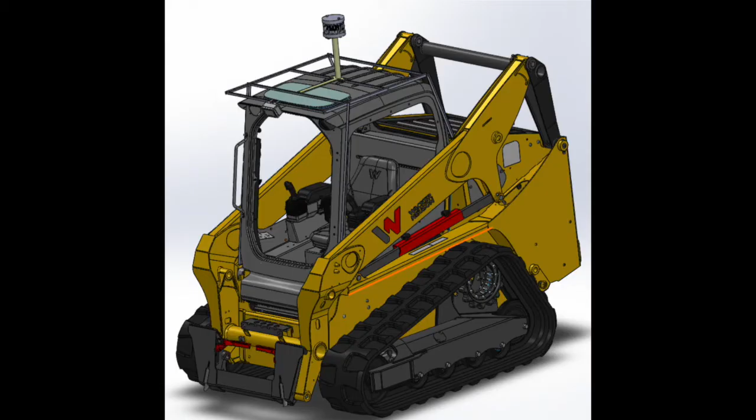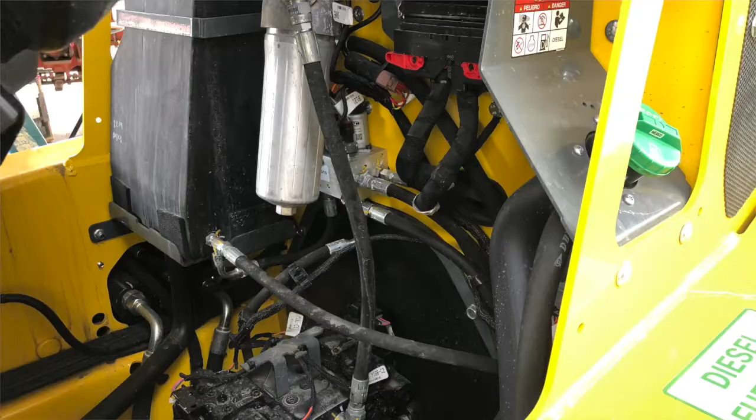EquipmentShare has tasked us with creating an autonomous-ready skid steer. By this, we mean making a skid steer that has all the systems in place to be ready for autonomy, minus the code to drive the vehicle. To do this, we planned on using a radar and two auxiliary cameras. But due to the radar being a prototype and not ready by January, we redesigned the system to use a LiDAR with two additional cameras. To interface between the vision subsystem and the vehicle, we used the NVIDIA Jetson TX2 to connect to the vehicle via the CAN bus, in addition to a computer simulation to mock the real-life design. This is what our project entailed. I'm Mark Carapino, and I'm a systems engineering major.

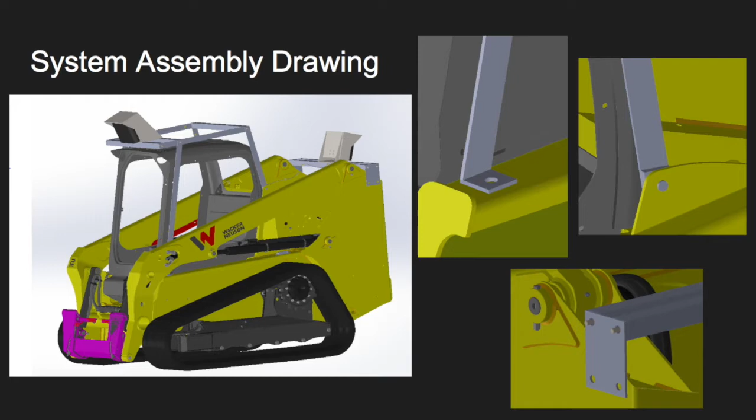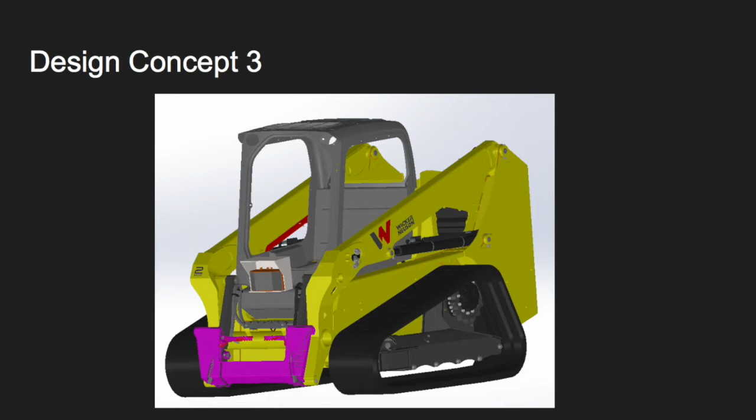Our approach to the problems of this project was to research materials to ensure they would meet the specs required, test those materials, and ensure the overall function of those materials in the system overall. On the screen, you can see some of our preliminary designs. Throughout the project, at the request of our sponsor, many changes were made to the overall system. We will show you how we responded to these changes with flexibility and ingenuity.

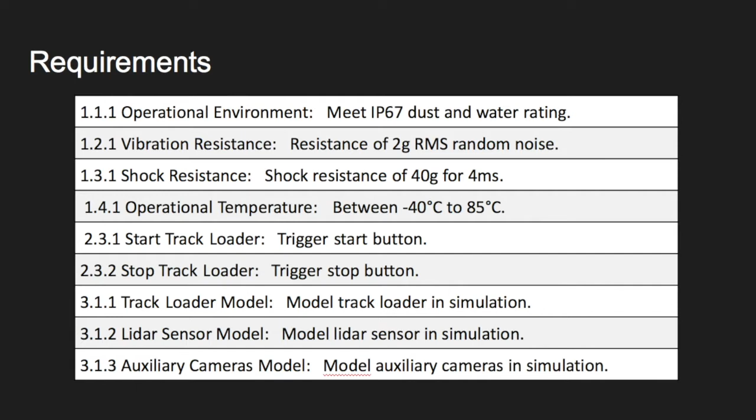Our major requirements state that our system must withstand shock, vibration, and varying temperatures. The performance requirements specify that the LiDAR is to be integrated onto the track loader and operate at its maximum potential. Additionally, we were required to operate the basic controls of the track loader. For this simulation, we are meant to demonstrate all components intended for the physical system of this project.

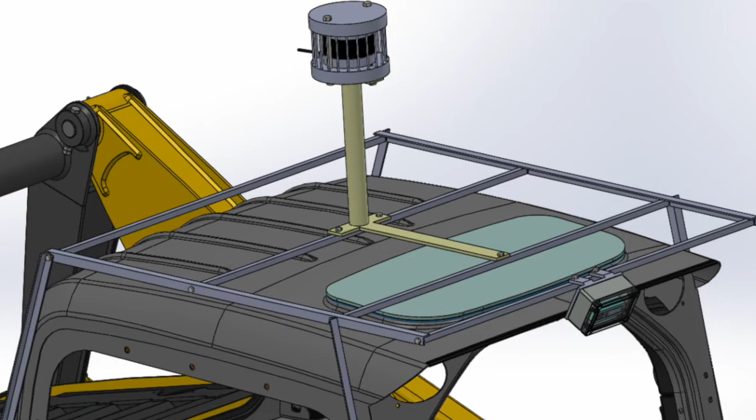In the first picture, you can see our Wacker Neuson skid loader with our final design integrated. The cage is made of 1/4-inch steel bars and secured to the loader using 5/8-inch thick grade 8 medium carbon alloy nuts and bolts. As you can see, there are several cross members running over the top of the cab to make sure the structure is rigid and also supports the heart of our project, our LiDAR.

The LiDAR and its enclosure are lifted nearly a foot above the top of the cage for maximum vision performance. The LiDAR is protected from rocks and other debris that may be found in the workplace by 1/4-inch steel bars welded to the bottom cap. The enclosure is capped on each end with a 1/4-inch thick steel measuring 6 inches in diameter.

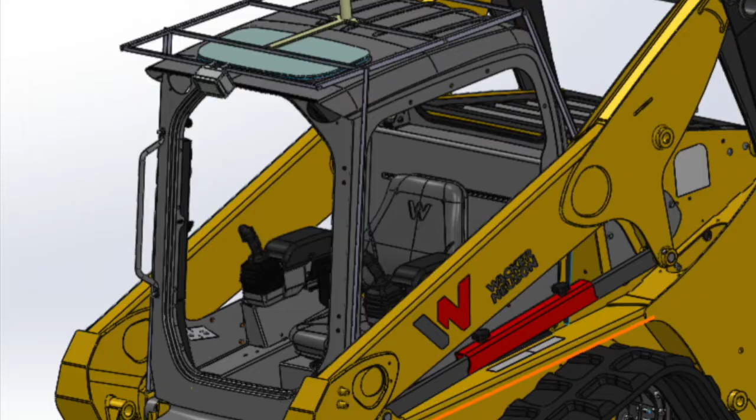Here you can see the pico flexx camera and the enclosure attached to the front of the cab and the rear hood. These are here to cover close quarter proximities that are not covered by the LiDAR. The enclosures are ordered straight from McMaster-Carr and modified with our 3D-printed holding tray that holds the camera right up against the plastic.

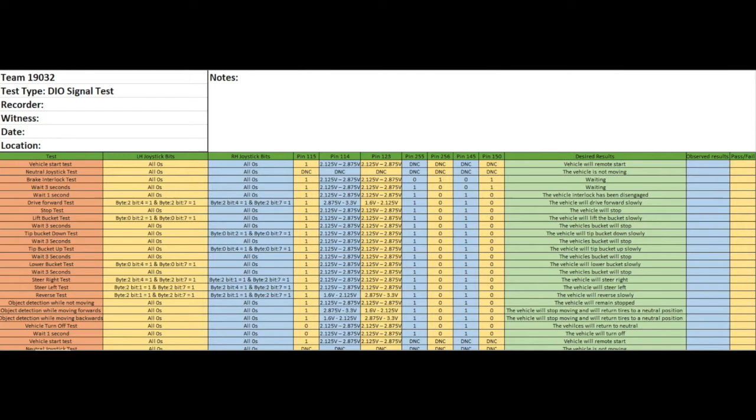A test plan to ensure that the digital I/O signals perform the correct functions to operate the vehicle was created. These signals, when sent to the machine control unit, would test all functions of the vehicle under the control of our system. A series of LiDAR tests were performed to ensure detection distances for humans and vehicles.

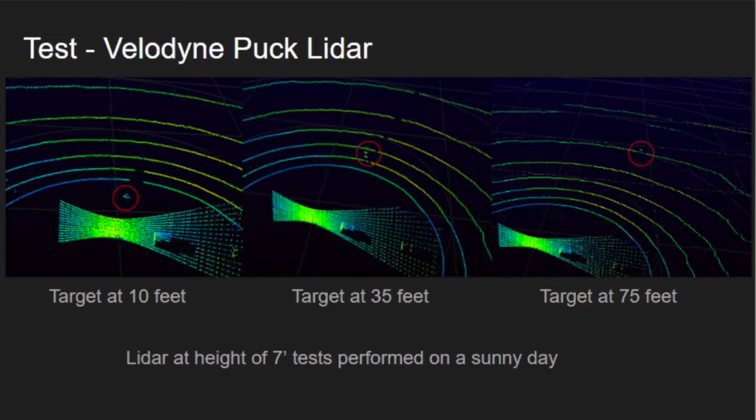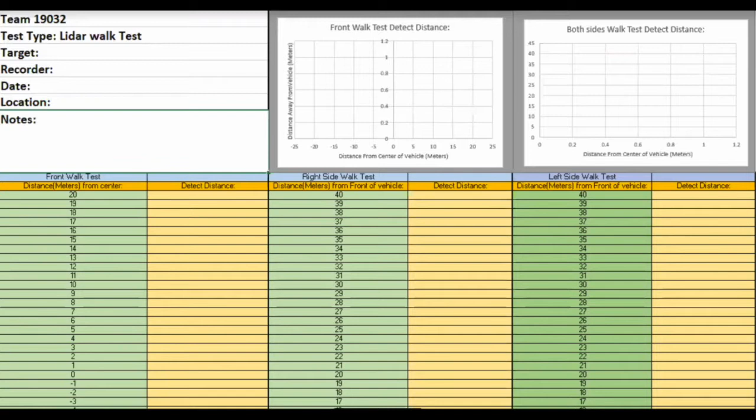These tests were performed with and without the acrylic protector. These tests confirmed that the LiDAR would not be able to see through the acrylic, contrary to what our research had predicted.

This discovery is what led us to change the acrylic shield to a wire shield, which performed as well as the LiDAR with no shielding at all.

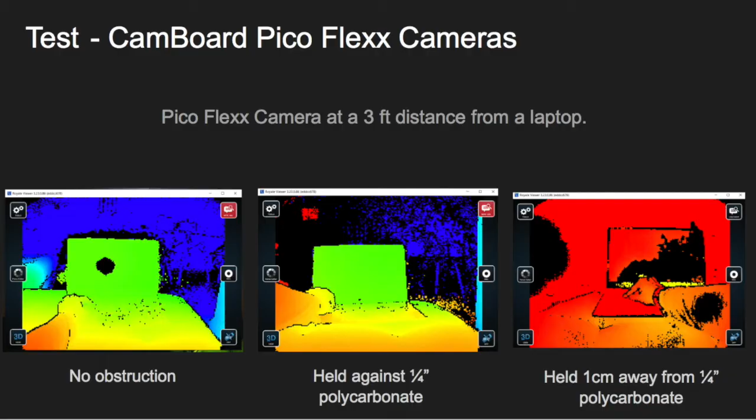In testing of the Camboard pico flexx camera, we found that it can capture a clear image when held directly against a 1/4-inch clear polycarbonate sheet. An IP67 rated enclosure with a clear polycarbonate cover would allow these cameras to capture data while mounted on the track loader.

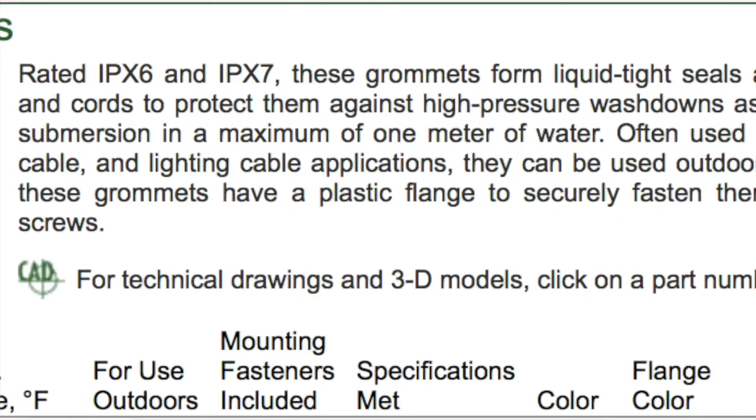One of our major system requirements is to ensure that the system meets IP67 water and dust ratings. Luckily, our new Velodyne LiDAR system meets these requirements straight from the factory. The cable junctions, however, are to be equipped with IP67 rated grommets.

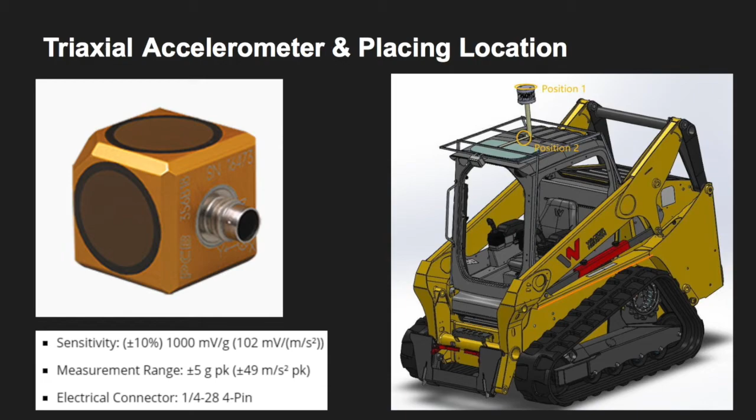The system requirement for shock resistance and vibration will be tested together by placing the Triaxial accelerometer on two different locations: on top of the LiDAR housing and on top of the outbuilt metal structure, right next to the LiDAR housing.

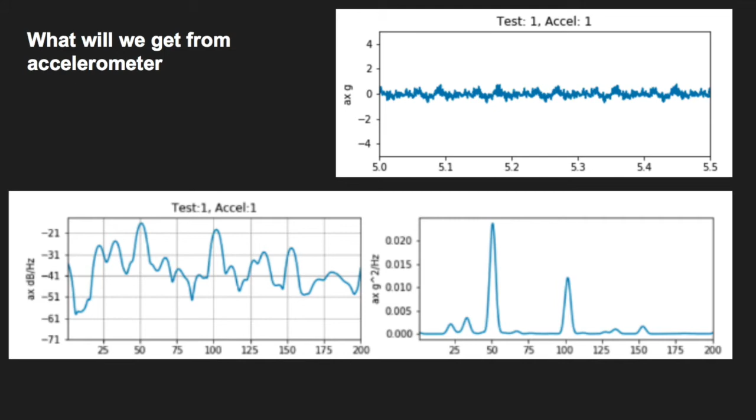After placing the accelerometer, we let the track loader run on both grass and rubber ground at high and low speed, steering in different directions. We use the accelerometer to collect data 5 to 10 seconds and 1 to 2 seconds after the vibration started.

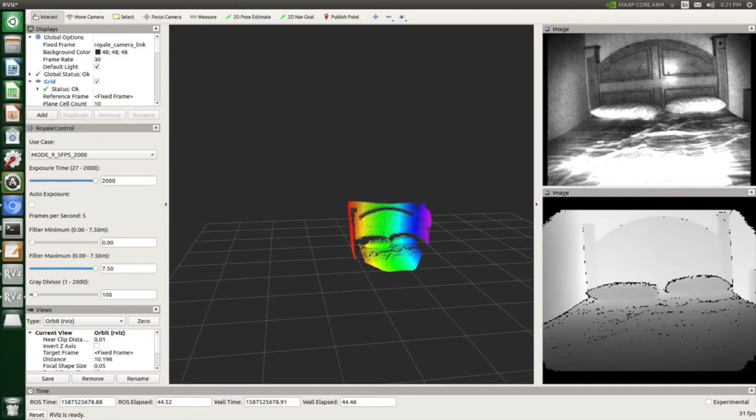From the project, I learned how to flash the Jetson TX2, like installing the Ubuntu system. I also learned a lot of command line skills to build the software from the source code on the Jetson. Here's a picture of flashing the Jetson TX2 successfully, and another testing the pico flexx camera software.

The timing of each aspect of a project could affect the completion of the entire system. So the earlier you communicate with your partners, the less time you spend solving problems. This project also offered us a great chance to cooperate with engineers from different fields.

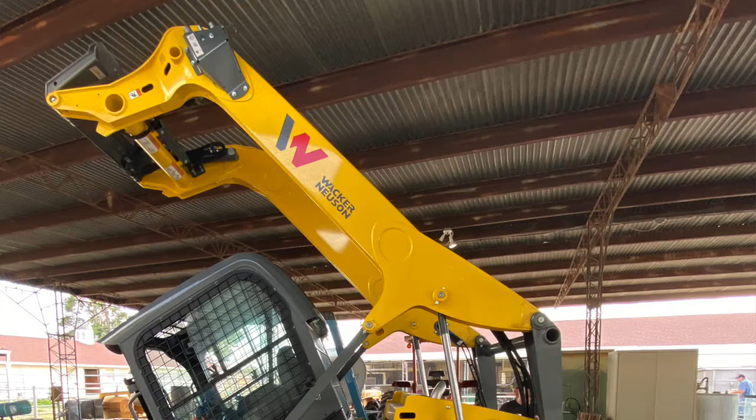This project granted our team the experience of learning to work around a track loader, from dismantling the interior to operating the bucket mechanism to lift the cabin. Creating a simulation was also a first for the group and gave us an opportunity to explore the subject.

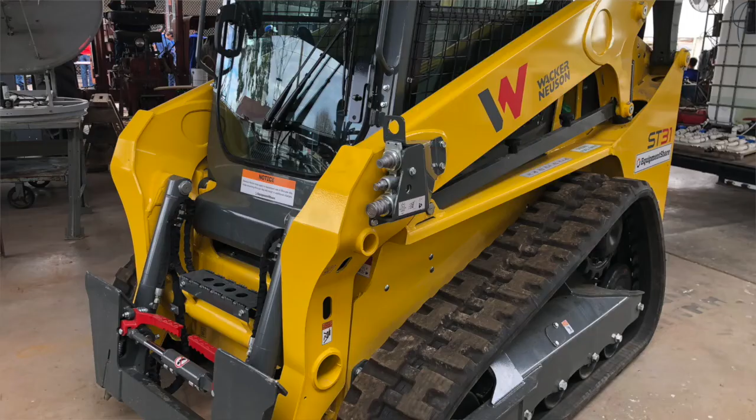When working around heavy machinery, it's extremely important to take the necessary safety precautions. This includes, but is not limited to, keeping a safe distance from the loader, especially the boom, while it's in operation. As far as fabrication, always be sure to wear eye and ear protection when working in the machine shop. Failure to do so can cause serious injury or even death, so it's important to be smart and completely aware of your surroundings at all times.

Regarding the electrical side of the project, we took many precautions in testing and ensuring proper power delivery to the system. Overpowering can cause expensive and irreversible damage to the components that we either purchased or were supplied with from EquipmentShare.

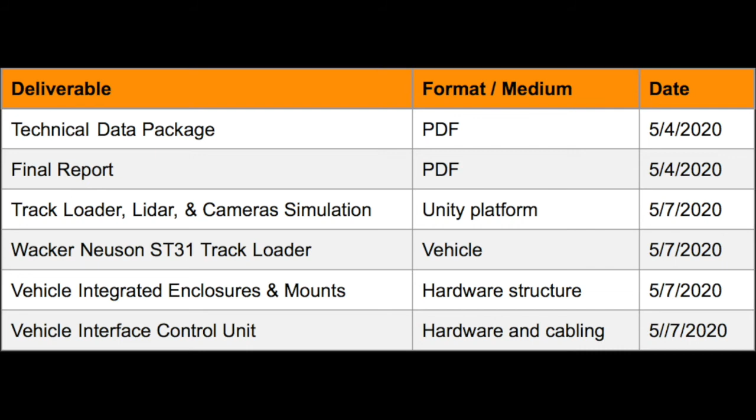For our deliverables to sponsors: the documented technical data package and our final report will be delivered by May 4th. And for the track loader, the LiDAR system, the cameras, and the control units, those will be delivered to sponsors by May 7th.